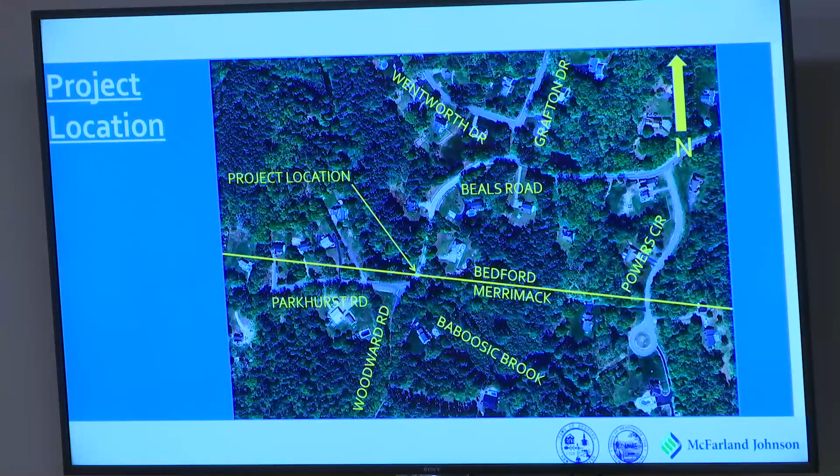So the project location is in the southwest corner of Bedford, or northwest corner of Merrimack. It's on Beals Road in Bedford, and it's Woodward Road in Merrimack over the town line. And also in the area is Parkhurst Road, and Baboosic Brook is running through the center there, as you can see. Sam's going to talk about the bridge now.

So why replace the bridge? As Brian mentioned, the bridge was constructed in 1928, rehabilitated in 1984. The 1984 rehabilitation focused on the superstructure, which is why its condition is rated higher, 7 out of 9. And just to build on the rating system that inspectors use for bridges, it's part of the National Bridge Inspection Standards. It evaluates 3 major components of the bridge: the deck, superstructure, and substructure. As Brian mentioned, both the deck and the superstructure are condition state 7, meaning good.

The substructure is rated a 4, and to land on the municipal red list for the state of New Hampshire, you need one of those major components to land in a 4. So the substructure being a 4 or poor puts it on the red list. And part of why it's rated 4 is the inspectors noted separation and settlement on the foundations.

The existing structure has a concrete abutment placed on top of stone masonry, and there's voids starting to show below those. That's what some of these pictures are showing here. The upper left, you kind of see that void coming underneath the corner, or the separation coming under the corner of the abutment. And then the upper picture on your right shows some of the separation in the wing walls.

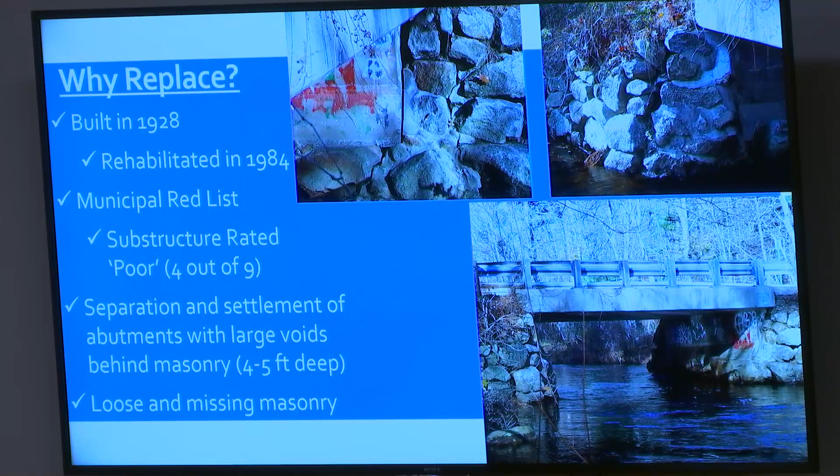So the project limits, because of the funding, it's funded through the state aid bridge program. Everything related to the project must be tied back to the bridge to be eligible for that funding. So that would be tree clearing, paving, guardrail, drainage, the loam and seed. Those efforts are associated with replacing the bridge. So elements that are affected on the road, like pavement replacement, tying back in, all that work is just to replace the bridge.

To back up a minute, the red line on the graphic is the rough project limits around the bridge. On the downstream side, we're keeping it a little tighter to the bridge because the topography on the upstream side goes a little bit wider. Then along Beals Road and Woodward Road, we're tying back in that pavement that's affected due to the bridge replacement.

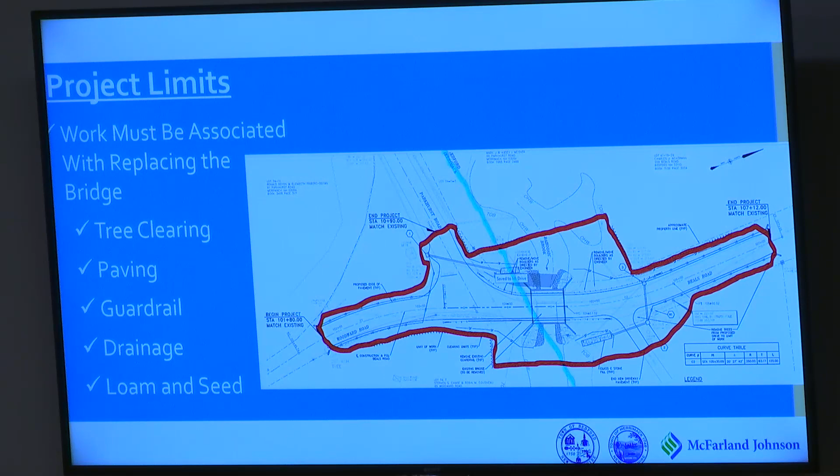So design considerations, similar to just about any bridge project we look at. These are kind of the main high-level ones when we look at bridge span and replacement alternatives. First, we really prefer long term the most durable structure we can get in there at the most effective cost.

So the graphic on your right here is what we're looking at, a buried structure. You see a lot of concrete there. The concrete wall over top the structure is a head wall that retains earth. There's a couple slides after this that will illustrate that a little bit better. And then the walls running along the bridge are wing walls that retain the earth on approach.

Hydraulic capacity - there's been a lot of larger storms around, so resiliency is important when we're looking at a structure. The new structure will be designed for the 50-year storm with 1 foot of freeboard. That freeboard is measured from the water surface elevation to the low point on the bridge, and that additional space is intended to allow debris to pass during high water events and not clog the opening.

As it pertains to the permitting and just the overall fit with the stream, wildlife connectivity is an important facet of designing a new bridge span. So providing dry passage through the bridge for terrestrial wildlife is part of it. And stream crossing compatibility - that's looking at stream metrics. Our environmental folks went out and did a stream assessment of the bridge area, and the span was developed considering economy and accommodating the stream based off those metrics.

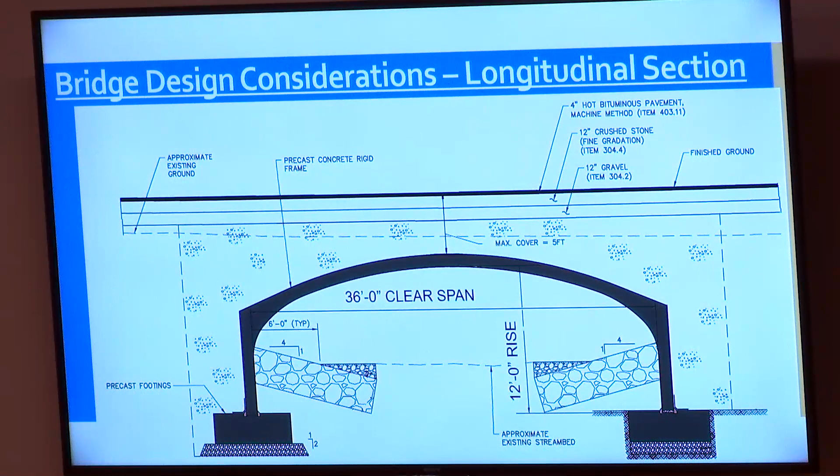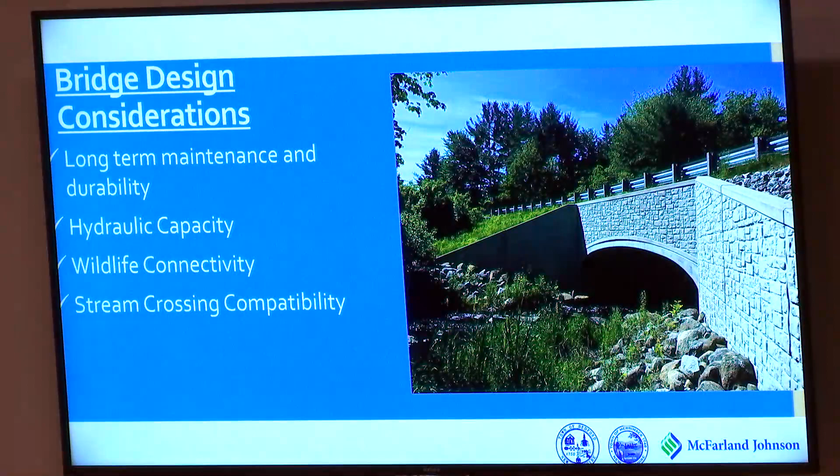Water diversion to build the bridge means we have to maintain the stream. These are schematics from other projects. Generally, they'd build a sandbag dam upstream and downstream, and support a temporary pipe on top of those sandbags through the crossing, the bridge area. That would maintain the flow of the stream during construction and allow the bridge area to be dry.

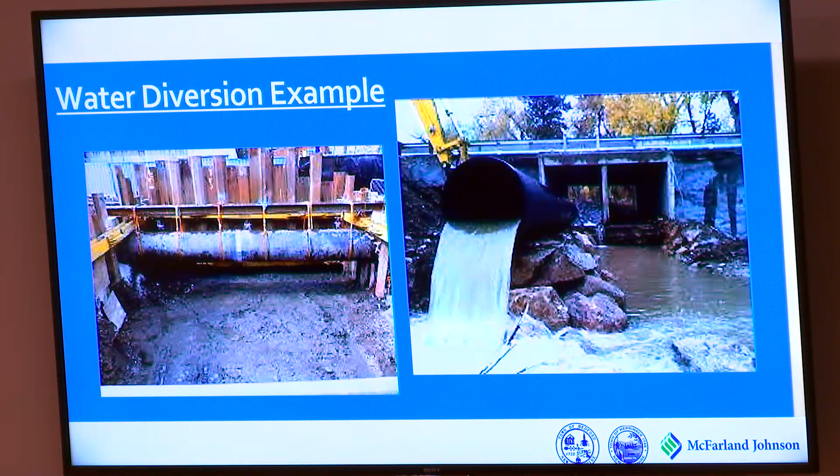Back to the roadway design. There are several considerations we had to take into account. There's approximately 700 vehicles per day crossing this bridge, and we're designing it for 30 miles an hour. There are some utility poles we're going to have to relocate as part of this, which I'll get into on one of the next slides.

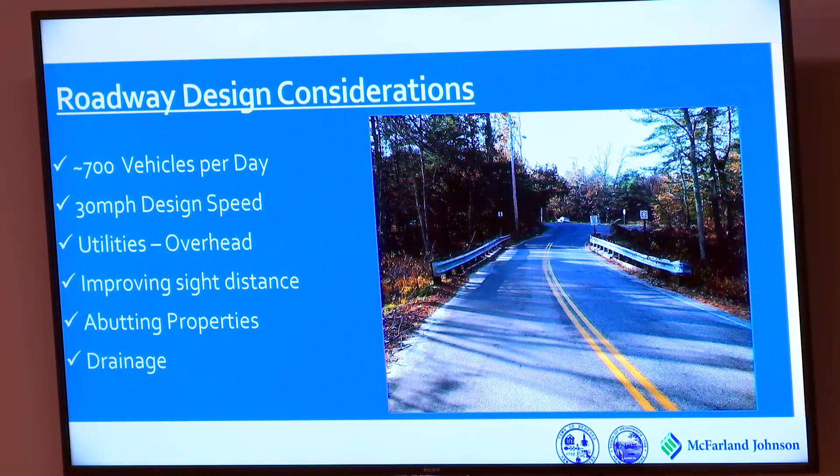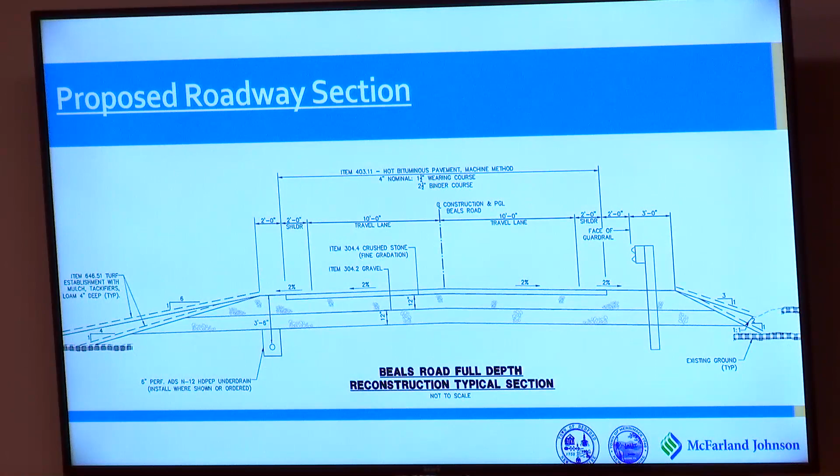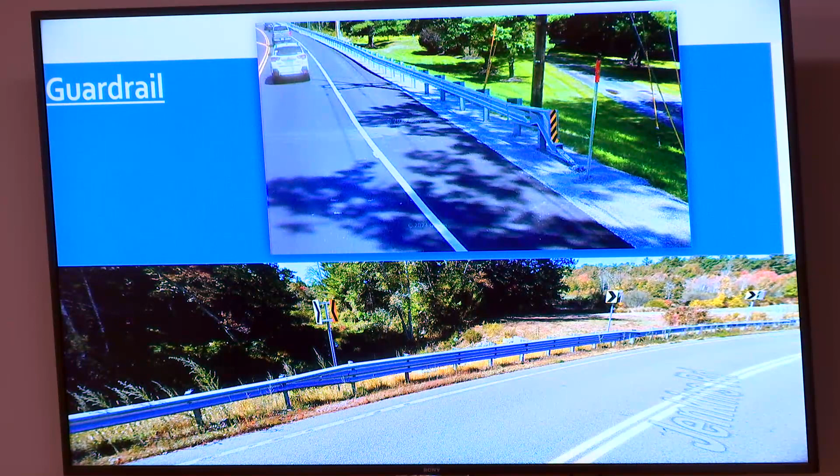Construction schedule and traffic control: to build the bridge, we need to close the road temporarily. The old bridge needs to be ripped out and a new one put in. Generally speaking, we're looking at about a 4-month closure at the location of the bridge for that to occur.

There may be traffic impacts before and after that closure, with lane reductions potentially needed to do utility relocations. Instead of doing that during the roadway closure, we could condense that by doing it ahead of time, keeping the road active. There may also be some slope work after the bridge is complete and reopened to traffic that may need some space on the road, so there might be a lane reduction for that too.

Total construction duration, roughly 6 months, from when the contractor gets out there and starts to when they're more or less departing the site. In terms of advertisement, we're looking at late this summer for advertising the project, and construction is anticipated to begin in early spring of 2025.

Brian? Oh, I didn't know you put it in front of me.

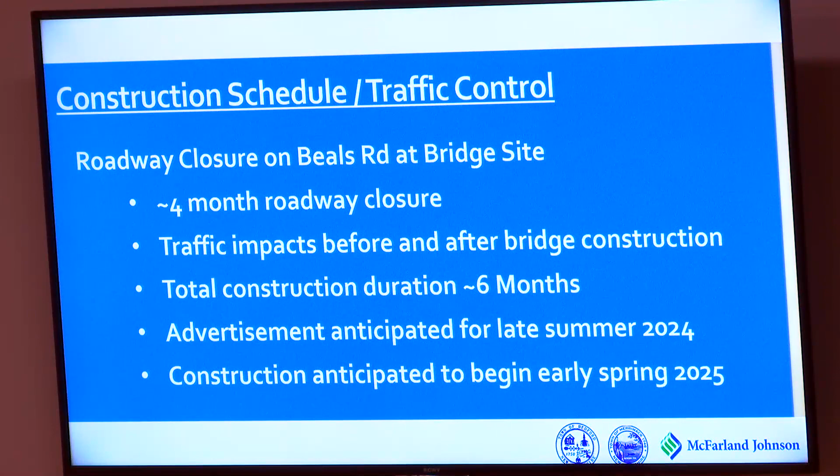We just wanted to talk about the detour a little bit too. The bridge is obviously going to be closed during construction, so to get from the south side to the north side of the bridge, we're going to provide a sign layout to take you down Parkhurst to Baboosic Lake Road, then that'll take you to Route 101, then you'll take Gage Girls Road in Bedford, and then get back to Beals Road from there. That's approximately a 9-minute detour, or 4.7 miles.

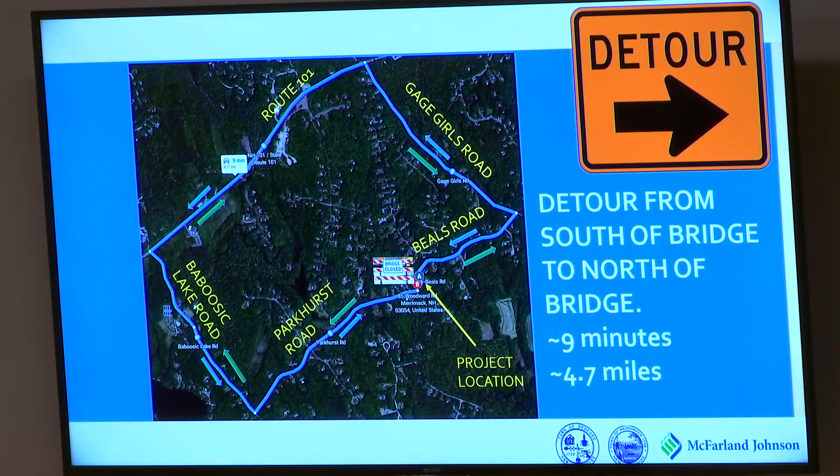We've also heard that a lot of Merrimack residents use this road to get to the transfer station, so we're also going to provide a sign package for that. From the south side, you'll take Woodward Road, then Bean Road, then Bedford Road, then Lawrence Road to get back to the transfer station. It's approximately 11 minutes and 4.7 miles.

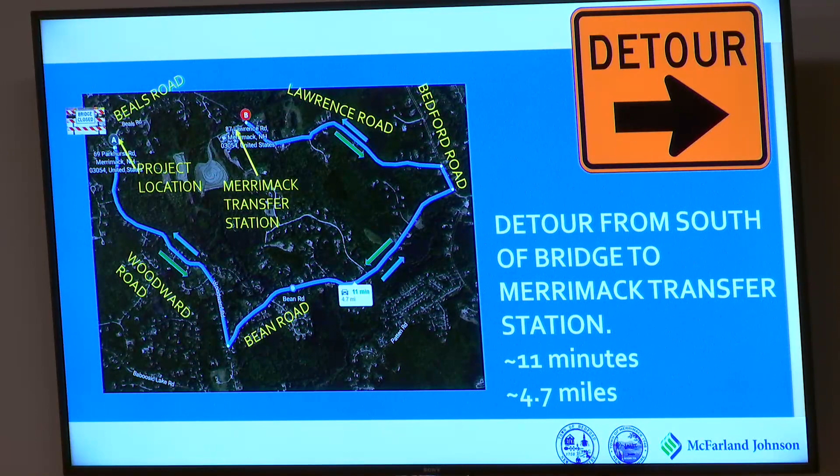For the estimate and funding, the total project cost including design fees is approximately $1.9 million at this point. The towns of Bedford and Merrimack are responsible for 20% of that, and 80% is paid by the state. Same for the right-of-way: 80% comes from the state aid bridge program and 20% is for the towns, split 17% Bedford and 3% Merrimack. Once we get to construction, it's 100% federally funded through the new MOBIL program, the Municipally Owned Bipartisan Infrastructure Law.

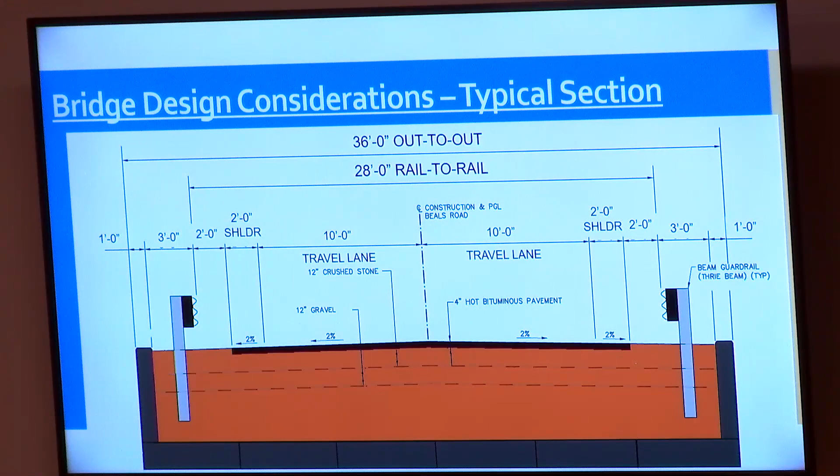If you go out there currently, even though there's a white line, the guardrail is pushed in on each side, so you know that people are basically riding along the... That's right. So the existing condition has a guardrail right here. So the new one's being pushed back 4 feet to give you that wider width.

You wouldn't be able to move that guardrail in and put the walkway on the other side of it, so you have a guardrail between the walkers and the road? Or shift the whole thing over a little bit, get rid of the 2 feet on one side and 6 feet on one side, and the guardrail over. Put a wider path on the upstream and then narrow it on the downstream, just because it's already a dangerous side.

We're just asking if you could speak into the mic. I'm sorry, they're not picking you up. Would you mind asking the question again, please?

Sorry, so the question was, to allow for better pedestrian traffic, instead of having that 4-foot improvement on each side from its current state, could we provide more allowance on one side, maybe like the upstream side, because that does provide better visibility, and have less of an allowance on the downstream side? That way you could have a 3 or 4 foot wide actual walking path to allow more clearance between you and the cars versus having just a little bit on either side.

Okay, thank you. I'd have to look in to see if that was considered or if that's a possibility. But I appreciate the sentiment and the question. That's all right.